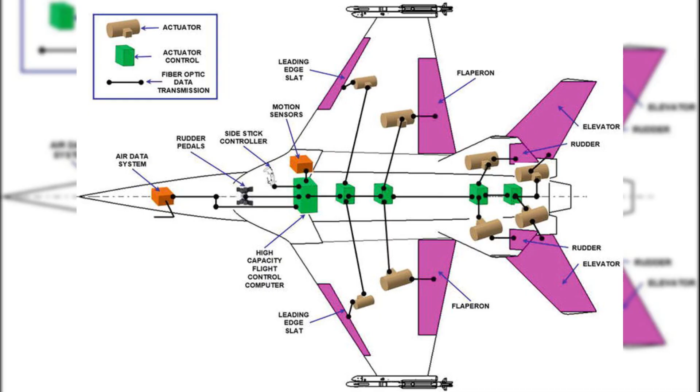The first critical thing to understand is this: a modern fighter jet is intentionally aerodynamically unstable. Unlike commercial aircraft, it is not designed to naturally return to straight and level flight. Without onboard computers, a modern fighter would be almost impossible to control. This instability is not a flaw. It is the source of its extreme maneuverability.

A fighter jet must satisfy several opposing requirements at the same time. It must be extremely fast to intercept targets. It must be incredibly agile for close-range air combat. It must carry weapons, fuel, sensors, and electronic systems. And it must remain controllable across an enormous speed range, from slow landing approaches to sustained supersonic flight.

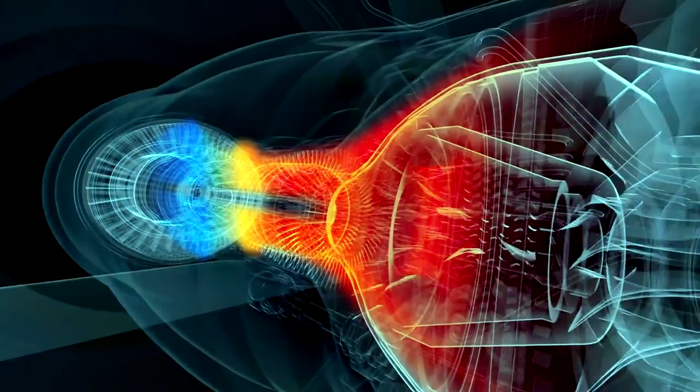This leads to one of the biggest misconceptions. A fighter jet does not fly because of engine power alone. The engine does not lift the aircraft into the air. Lift, maneuvering, and control come from aerodynamics, pressure differences, airflow management, and controlled generation of lift. The engine's role is to provide the energy needed to reach and maintain the required speed.

However, fighter jet aerodynamics work very differently from those of civilian aircraft. Wings are shorter, sharply swept, and often combined with additional lifting surfaces. Airflow is deliberately manipulated to create controlled vortices that help maintain lift even at extreme angles of attack. This is why a fighter jet can fly in conditions that would cause a conventional airplane to stall and fall out of the sky.

Speed introduces another layer of complexity. As an aircraft approaches the speed of sound, air no longer behaves smoothly. Shock waves form, drag increases dramatically, and control becomes more difficult. Fighter jets must therefore be shaped specifically for transonic and supersonic flight, with airframes designed to manage shock waves and minimize energy loss. And this is only the beginning.

In reality, the pilot does not directly control the aircraft at all. Instead, the pilot issues commands to computers that make thousands of corrections per second, constantly adjusting control surfaces and engine behavior to keep the aircraft stable and responsive.

To understand why a fighter jet can maneuver in ways that seem almost impossible, you have to abandon the rules of conventional aircraft design. Commercial airplanes are built to be naturally stable. If the pilot releases the controls, the aircraft tends to return to straight and level flight. A fighter jet is designed to do the exact opposite. Modern fighter jets are deliberately aerodynamically unstable.

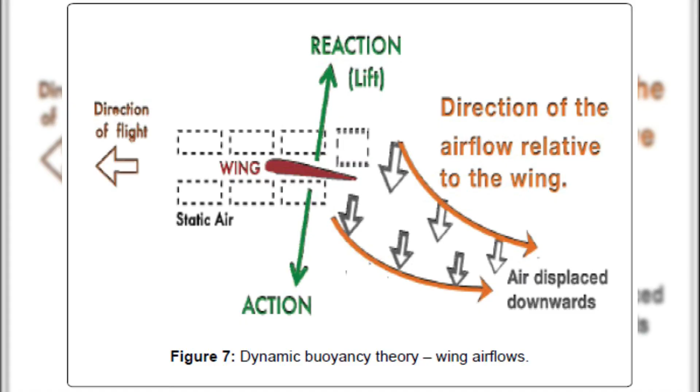A key concept here is the angle of attack, the angle between the wing and the oncoming airflow. In most aircraft, exceeding a critical angle of attack causes airflow to separate from the wing, leading to a stall and loss of lift. Fighter jets are designed to operate beyond traditional stall limits. Rather than avoiding airflow separation, they use it.

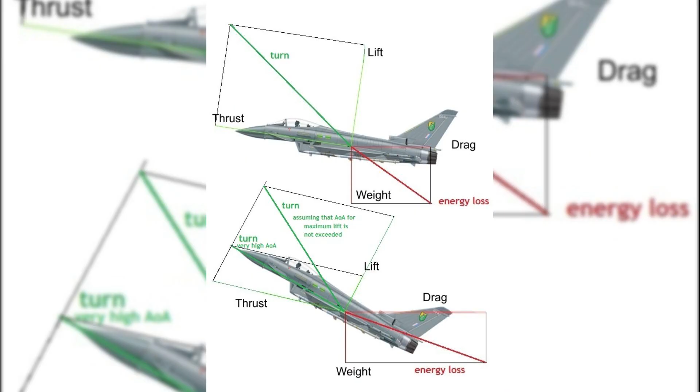At high angles of attack, fighter jets intentionally generate strong aerodynamic vortices along the leading edges of the wings and the fuselage. These swirling flows of air keep energy in the airflow, delaying full separation and maintaining lift even when the aircraft is pitched steeply upward. Lift is no longer produced only by smooth airflow over a wing profile, but by vortex-controlled flow.

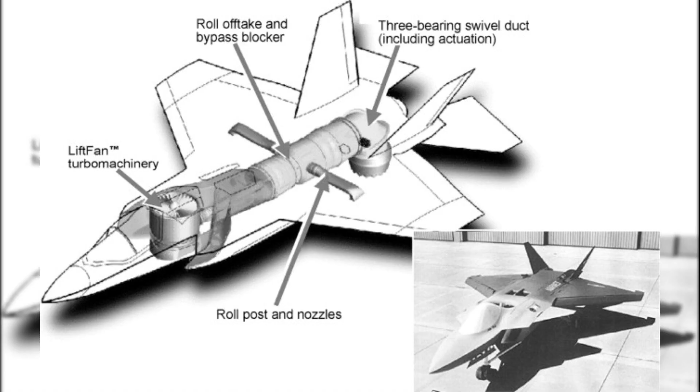The fuselage itself also plays a critical role. In a fighter jet, the fuselage is not just a container for fuel, weapons, and the pilot. It is an active lifting surface. At high speeds and extreme angles, the body of the aircraft contributes significantly to total lift. The entire aircraft is designed as a single aerodynamic system, rather than a collection of separate components.

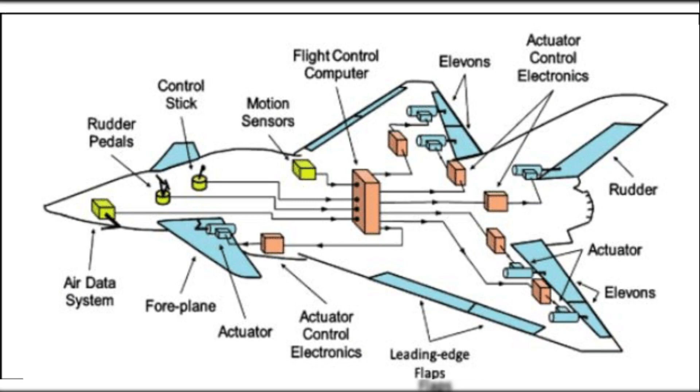Such extreme aerodynamics would be impossible for a human to manage directly. Reaction times are too short, and the aircraft's instability is too severe. This is why all modern fighter jets rely on fly-by-wire control systems. The pilot's inputs are interpreted by computers, which constantly adjust control surfaces to keep the aircraft within controllable limits while still executing the desired maneuver.

From the pilot's perspective, the jet feels stable and responsive. From a physics perspective, it is a machine that is constantly on the edge of losing control, saved only by continuous, rapid computer corrections occurring hundreds or thousands of times per second.

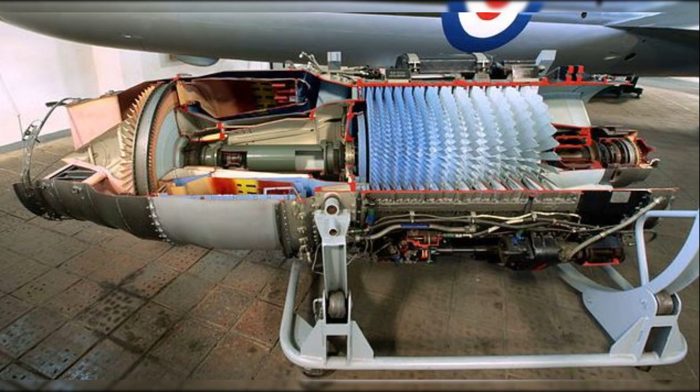Aerodynamics alone, however, is not enough. All of this extreme maneuvering, vortex generation, and shockwave management requires vast amounts of energy. Without an engine capable of delivering sustained thrust under extreme conditions, none of this design would be usable. In a fighter jet, the engine is not just a source of propulsion. It is a core part of the aircraft's combat capability, designed to operate where ordinary jet engines simply cannot.

A fighter engine must deliver massive thrust, respond instantly to pilot commands, and remain stable across an extreme range of speeds, altitudes, and airflow conditions, including sustained supersonic flight. At its core, a jet engine works on a simple principle. Air is drawn in, compressed, mixed with fuel, ignited, and expelled rearward at very high speed. The reaction force produces thrust.

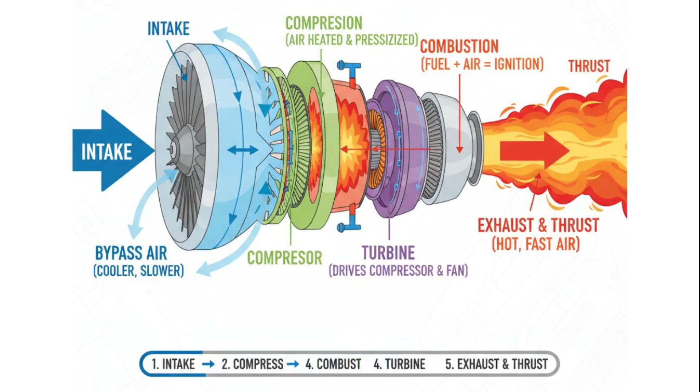In a fighter jet, however, every step of this process is pushed to its absolute limits. Air may enter the engine at speeds close to or above the speed of sound. Temperatures inside the engine exceed the melting point of many metals, and pressure ratios are extreme.

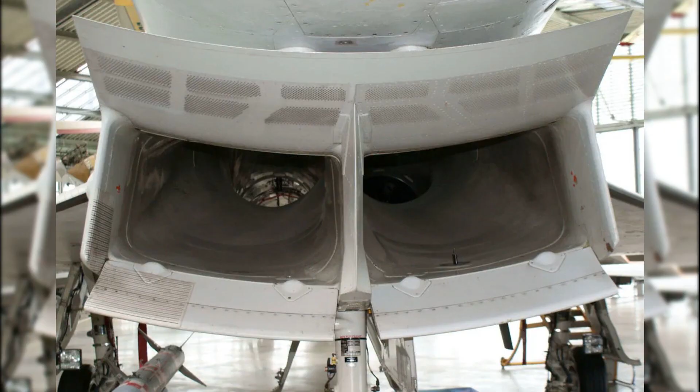One of the most critical components is the air intake. At high speed, especially in supersonic flight, air cannot simply rush straight into the engine. If it did, the compressor would stall or be destroyed. Fighter jets use carefully shaped intakes that create shock waves to slow the airflow before it reaches the engine. These shock waves reduce the air's speed while increasing its pressure, allowing the engine to function safely. The exact geometry of the intake has a major impact on performance and is the result of intense aerodynamic optimization.

Inside the engine, temperatures are so high that conventional materials would fail instantly. Turbine blades are made from single crystal superalloys and often cooled internally by carefully routed airflow. This allows the engine to survive temperatures hotter than molten metal. Without these advanced materials and cooling techniques, modern fighter engines would be impossible.

A defining feature of fighter jets is the afterburner. When engaged, additional fuel is injected into the exhaust stream behind the turbine and ignited. This dramatically increases thrust, allowing rapid acceleration, short takeoffs with heavy payloads, and the ability to push through the sound barrier. The cost is enormous fuel consumption. In afterburner, a fighter jet can burn fuel at a rate that limits its use to short periods.

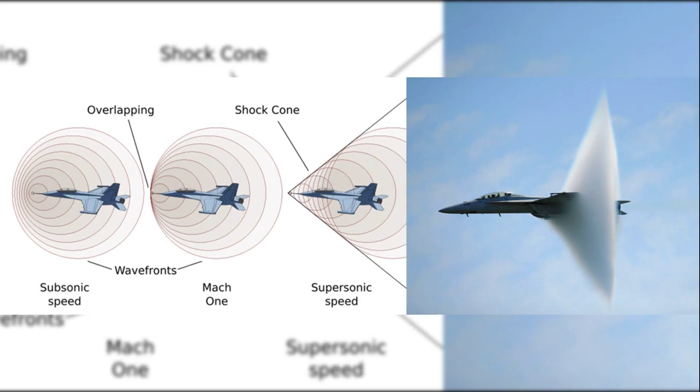Supersonic flight introduces a completely different aerodynamic regime. As the jet approaches Mach 1, drag rises sharply due to shockwave formation. Breaking through this barrier requires a surge of thrust. Some modern fighters are capable of supercruise, meaning they can sustain supersonic flight without using afterburner. This is only possible through a combination of highly efficient engines and aerodynamics optimized to minimize wave drag.

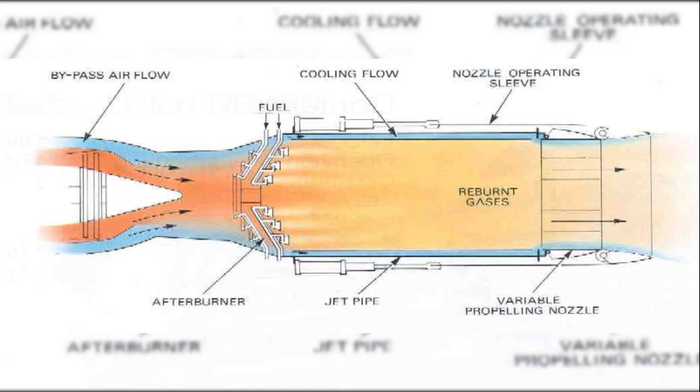In many modern fighters, the engine also contributes directly to maneuverability through thrust vectoring. By slightly redirecting the exhaust flow, the engine can help rotate the aircraft, especially at low speeds or very high angles of attack, where traditional control surfaces lose effectiveness. In these situations, the engine becomes part of the flight control system itself. The engine, then, provides more than speed. It provides control, responsiveness, and survivability in flight regimes where physics becomes unforgiving.

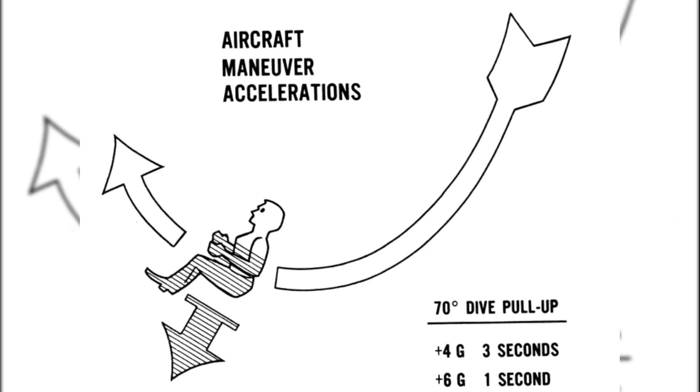Yet even with immense thrust and advanced aerodynamics, the fighter jet would still be unusable without protecting the pilot and managing the aircraft's instability. When a fighter jet reaches its full combat performance, the aircraft itself is no longer the limiting factor. The human body is. During aggressive maneuvers, the pilot experiences extreme G-forces that multiply their effective body weight many times over. Blood is pulled away from the brain, oxygen supply drops, and without protection, loss of consciousness would occur in seconds. For this reason, modern fighter jets are designed around human physiology as much as aerodynamics and propulsion.

Pilots wear anti-G suits that automatically inflate under high acceleration, squeezing the legs and abdomen to prevent blood from pooling away from the brain. The cockpit seat is reclined rather than upright, reducing the vertical distance blood must travel. Even with these measures, human tolerance defines a hard operational limit that aircraft performance often exceeds.

At this point, flight computers become essential. A modern fighter jet cannot be flown manually in the traditional sense. Fly-by-wire systems replace mechanical linkages with electronic signals. The pilot does not directly move control surfaces. Instead, they express intent, roll, pitch, accelerate, and onboard computers calculate how to safely and efficiently achieve that outcome.

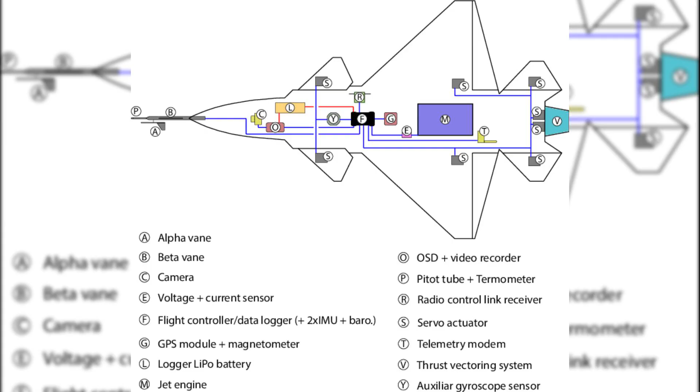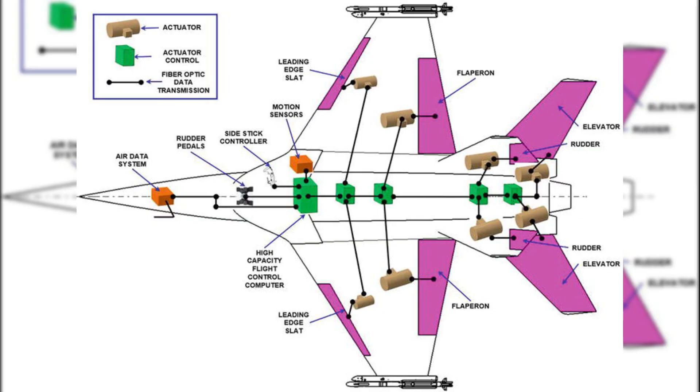These computers constantly evaluate airspeed, angle of attack, structural limits, G-forces, engine state, and aerodynamic stability. Thousands of corrections per second are made to control surfaces, engine output, and sometimes thrust vectoring. Without this continuous digital intervention, the aircraft's inherent instability would cause it to depart controlled flight almost instantly.

Sensors further redefine how the aircraft is operated. A fighter jet is not simply an airplane, it is a networked sensing platform. Radar, infrared search and track systems, electronic warfare receivers, and data links generate enormous volumes of information. No human could process this data directly, especially under combat stress.

To solve this, onboard systems perform sensor fusion. Data from multiple sources is combined into a single, coherent tactical picture. Instead of raw signals, the pilot sees interpreted information: threats, targets, priorities, and safe maneuvering options. Decision-making is elevated from managing data to managing outcomes.

Weapons systems follow the same logic. Missiles, guns, and electronic countermeasures are tightly integrated with sensors and flight controls. Computers calculate firing solutions, predict trajectories, and stabilize the aircraft during weapon release. The pilot authorizes actions, but execution is handled largely by software to ensure accuracy and survivability.

This reveals the true nature of a modern fighter jet. It is not a machine that a pilot flies in the traditional sense. It is a highly unstable, software-controlled system that uses aerodynamics at the edge of stall, engines at the edge of material limits, and humans at the edge of physiological endurance. Without computers, it would fall from the sky. Without a pilot, it would lack judgment and intent.